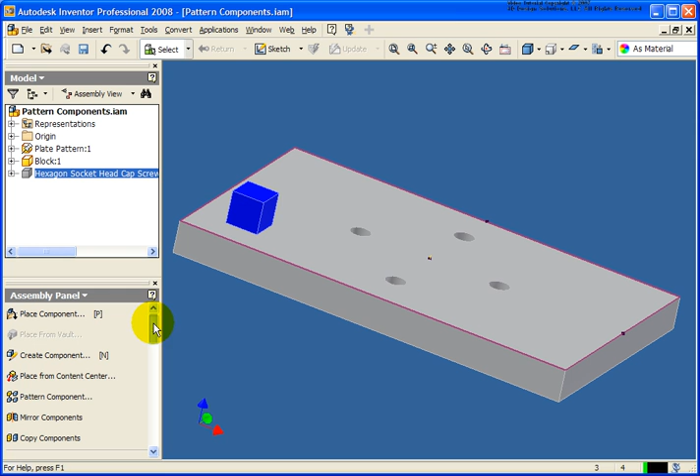So what we're going to do is go back and do the pattern component tool. But before I click on that, I want you to be aware, if I slide on down here, there's also a rectangular pattern tool. Now they're very different. Rectangular pattern is going to be used to create an assembly feature, which will be covered in a later lesson. So make sure in this case that we select the right tool, pattern components.

And we have three different options here for doing a pattern component: associative, rectangular, and circular. We're going to cover all three in this lesson, but I'm going to start off by doing the rectangular. So I'm just going to go back to the component, and I want to pattern that block. In this case, you could also select multiple files if you needed to pattern them as well. Now I'm going to select the column. This is very similar to the feature pattern that you have done in a previous lesson.

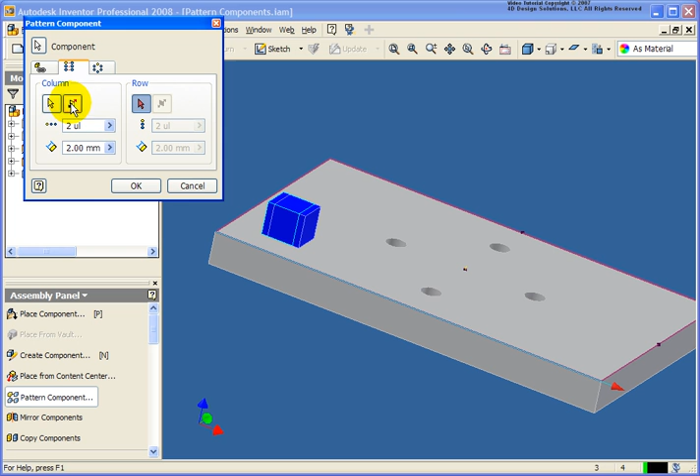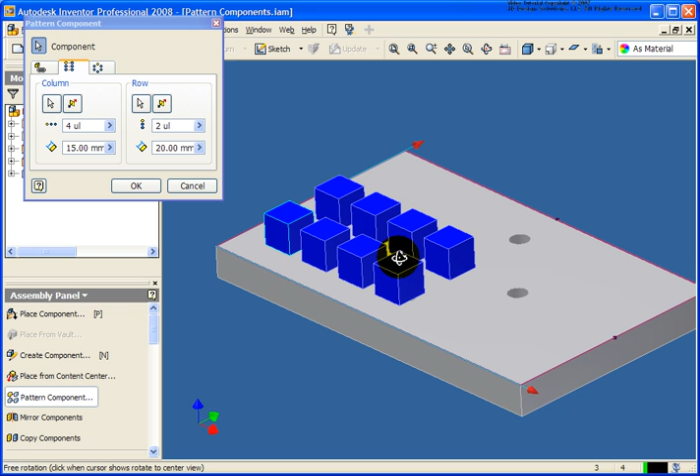So I'm going to go back and select an edge. I'm going to reverse the direction. And how many do I want? In this case, let's do 4 with a spacing of 15. And you can see I get the preview image. And let's also do a second row, and let's just put that at a spacing of 20. So we get the preview, so we know exactly what we're going to get. I'm going to go ahead and click on OK.

You'll notice once I've done that, I now have the component pattern inside the browser. Now each of these are an element, and underneath that element you'll notice that we have block 1. And let me go back and expand element 2. You can see that it's block with the colon 2, telling me that they're all tied to the exact same occurrence. So let's find out if that's really true.

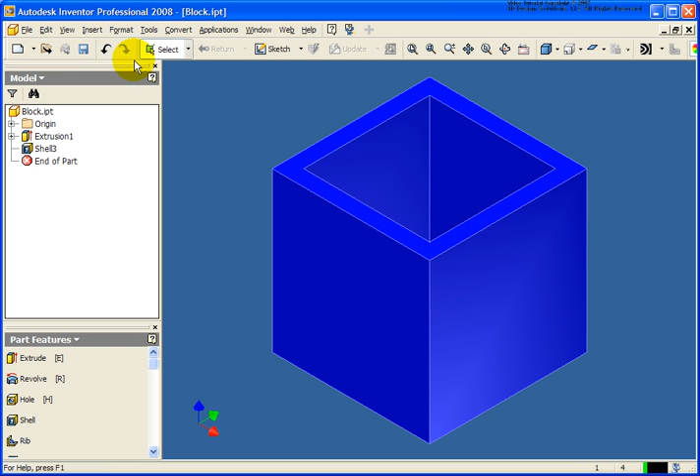I'm going to open up the original block and let's just shell out, make a dramatic change to this part. Go ahead and save that. I'm going to close out of this window, and you can see that all of the elements are all tied to the exact same file. So there's a couple of things we can do now with these elements. I can right click on the element name, and I have two options, suppress and independent.

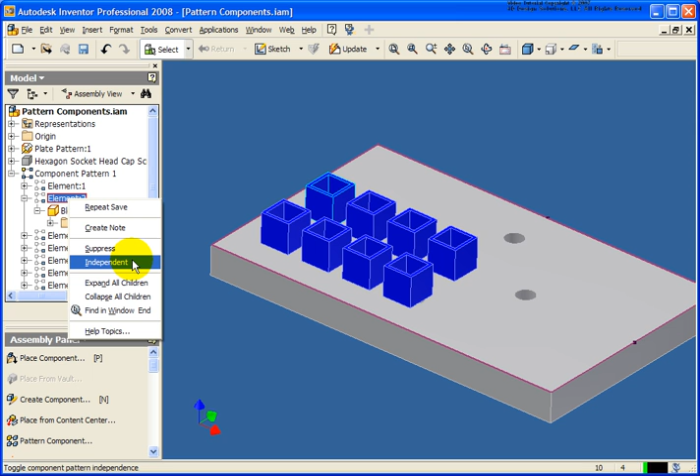So let's first of all click on independent, and when I do that, you see that I can grab that file and I can move it around. The other components, if I try to move them around, you'll see I cannot do that because they are all tied to the pattern component.

So when I made it independent, you'll notice I now have a red X inside of the browser to tell me that this component is independent of everything else, and I can do whatever I need to with that. If I wanted to, I could go back and delete it, or reconstrain it if I needed to. In this case, I'm going to undo, bring it right back to where it was.

And let's take a look at the suppress option. Again, right click, suppress, and you'll see that I have the line going through it, telling me that it's still there, it's just not visible on the screen.

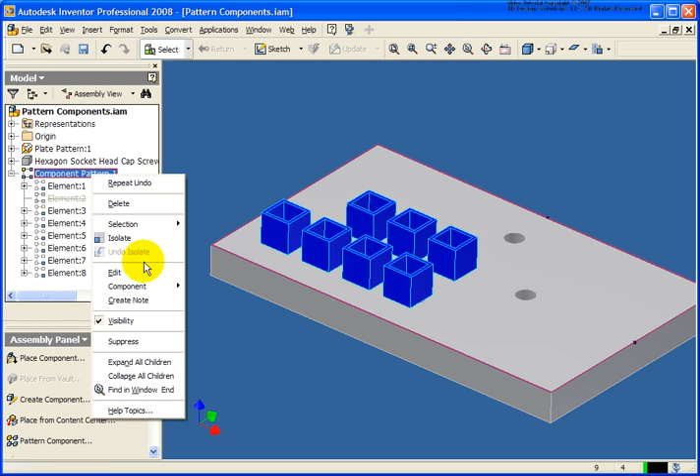So now let's go back and let's edit the component pattern itself. And let's change the number that we have for each of these. So we'll change the first one to 5, and let's change the spacing to 20, and we'll change our second one, so we'll have 3 of those.

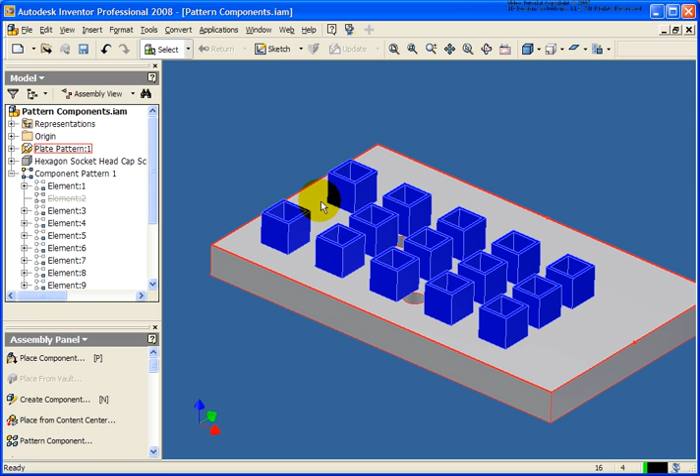In this case, let's change the spacing back down to 15, and you can see that everything was updated, and the component element that was suppressed is still not visible because it's suppressed, so in this case let's bring it back. I'm going to right click. In this case we will uncheck the suppress to bring it on back.

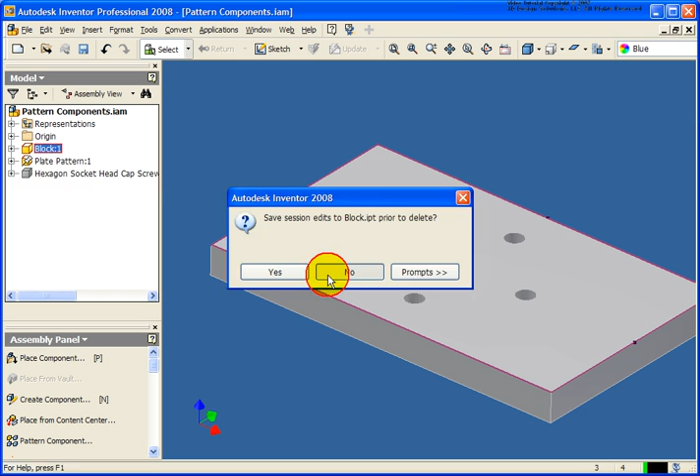For the next portion of the exercise, we're going to take a look at the circular pattern. So what I'm going to do in this case, I'm just going to delete that block because we don't need it for this portion of the exercise. And you'll notice I also have a hexagon socket part here, and I'm going to turn its visibility back on. Just going to slide that back down.

I'm going to hit C on the keyboard, and I'm going to apply an insert constraint between these circular edges, and we'll apply that.

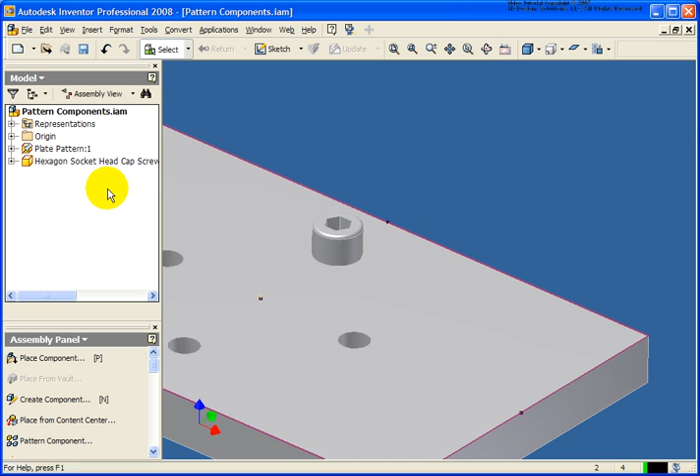Again, let's go back and we're going to click on the Pattern Component tool, and under the circular option I'm going to select on the bolt, and then back in the dialog box if I click on the axis direction I'm going to select on the work axis that already exists inside of this file, and you can see at this point I can go back, I can change the number and the spacing that I want.

As you can see, it's updating automatically, but obviously that's not what I want, so I'm going to change that back to 4 and change the spacing back to 90. Go ahead and click OK.

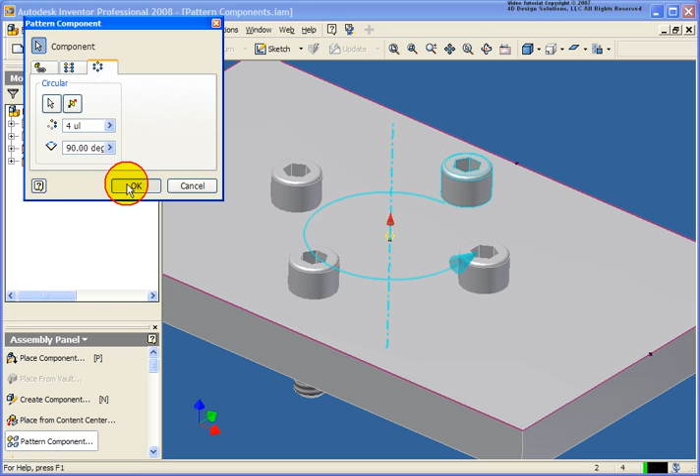Now if the number of holes change, let's see what happens to the bolts. So I'm going to go back and make that bottom plate the active component. I'm going to edit the circular pattern just by double clicking on it, and let's change the number of holes to 6.

Click return to get back to the assembly, and you'll see that the bolts are no longer matching up to the holes because they're not tied to one another. So in this case, let's delete the circular pattern. Of course, I could come back and edit that and change it to the correct spacing to align with the 6 holes. But let's show the second circular method here in this case.

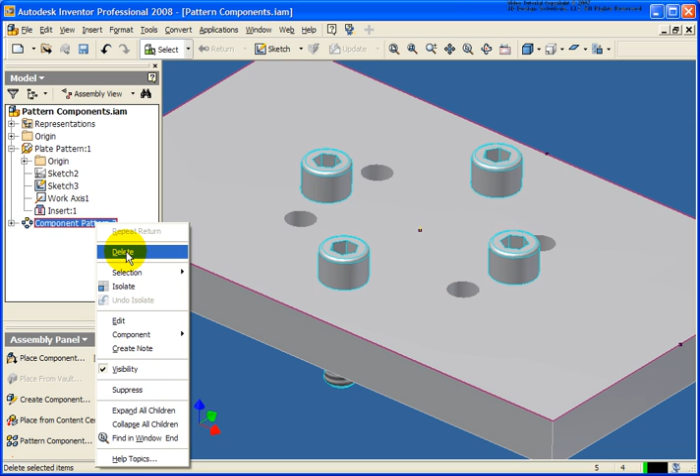So again, I'm going to click on the pattern component, and we're going to do the very first one, which is going to be associative. So the part is going to be the bolt.

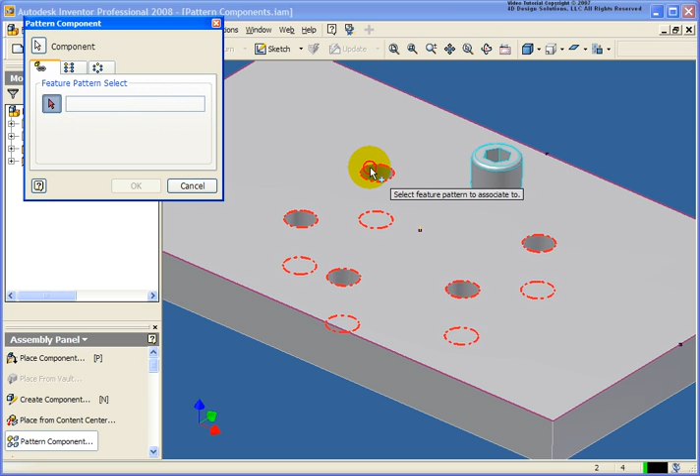And then for the associative feature pattern, in this case we're just going to select on the circular pattern back in that plate. It could also be a rectangular pattern, doesn't have to be circular. Click OK, and you see that the number of bolts aligns to that feature.

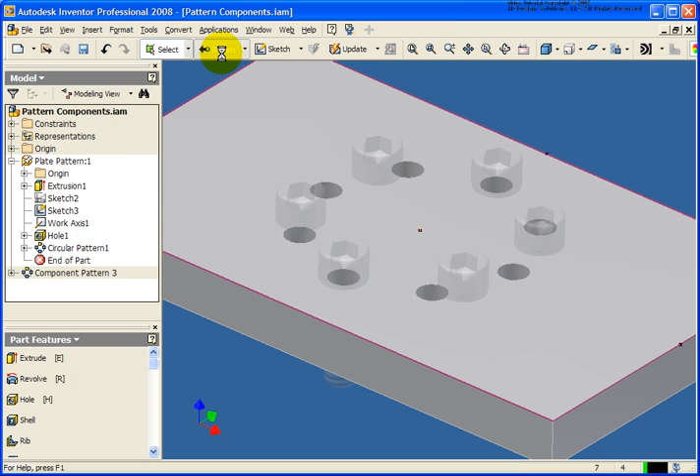So again, we'll go back and make one more change to that pattern of the number of holes. Let's change it to 8. Click return, and the number of bolts will match exactly the number of holes that we have in the original file.